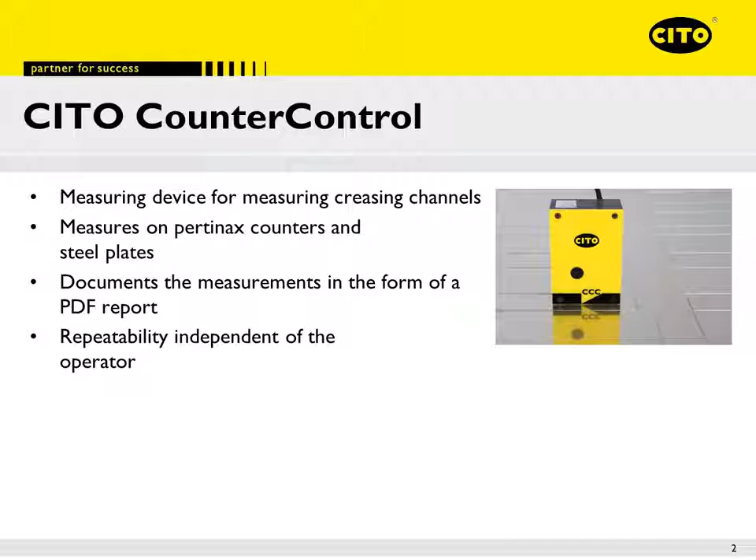CITO CounterControl is a measuring device for measuring creasing channels in creasing matrices. Now for the first time, with CITO CounterControl, the geometry of the creasing channels in the creasing matrices can be measured, and then monitored during production, so that production can be adjusted accordingly. By using CITO CounterControl, the dimensional accuracy of creasing channels can be demonstrated to the customer.

CITO CounterControl is a mobile camera-based measuring device that uses special software for measuring creasing channels. A camera is built into the hardware of the CITO CounterControl measuring device, which takes images of the test item and transmits these to the software. The software subsequently automatically takes over analysis of the image and shows the values on the screen of a Windows-based computer. A Windows tablet can also be used, of course.

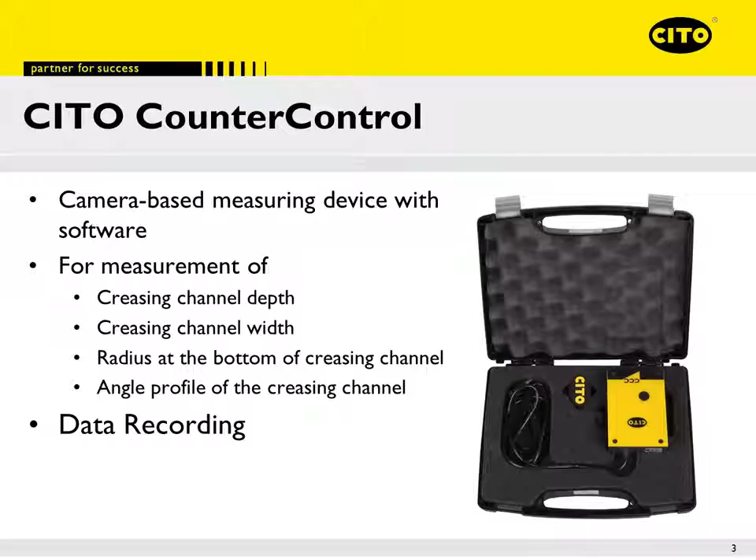Where do the benefits of CITO CounterControl lie? Up until now, automatic measuring systems for checking milled creasing channels have not been available on the market. With CITO CounterControl, quality standards can be defined and tested during production, for the first time. This quality standard can be recorded and added to the client's orders.

The vertical measuring position of the measuring width can be specified in the CITO CounterControl software. This ensures that milling angles at both edges of the opening do not result in measuring errors. Measuring errors are eliminated due to the repeatable measuring precision of CITO CounterControl. This reduces costs in the production process and gives the user a high degree of process reliability. The measuring accuracy is independent of the operator.

CITO CounterControl can also be used in press rooms. It can establish wear on Pertinax matrices, and thus avoid machine downtime in advance.

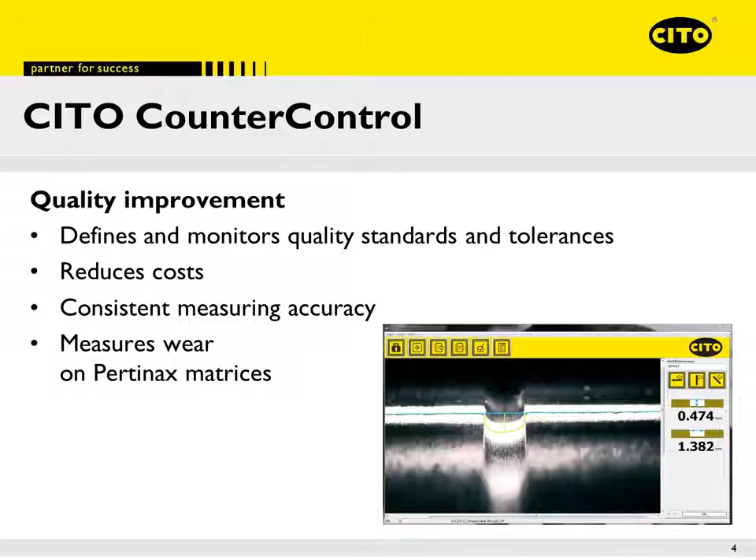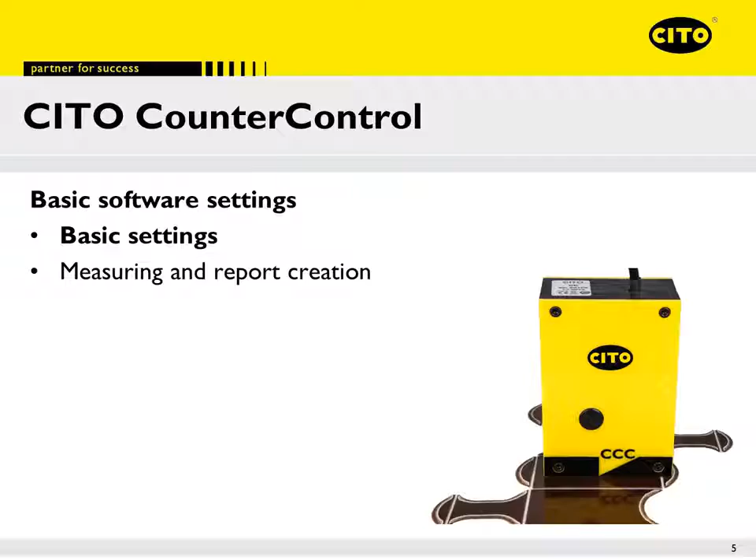So, how does CITO CounterControl work in practice? Basic settings. First, select the basic software settings. Choose the language you want to work in. In the next tab, set the measuring unit and the number of decimal places required. In the input field to the left of the graphic, enter the height at which the width of the creasing channel is to be measured. This value specifies the distance of the measuring point from the upper edge of the test sample.

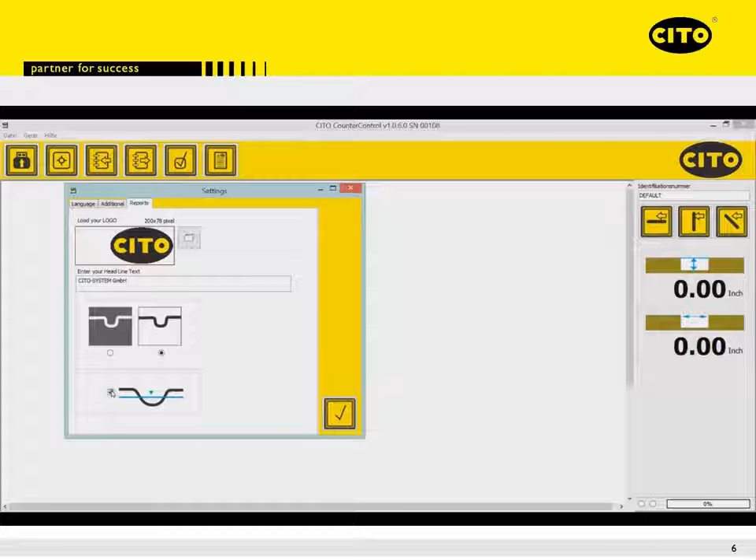In the two check boxes, on the right-hand side, select whether the calculation of the radius and angle is to be executed and displayed in the report. On the third page you can store a company logo and company details. Via the next two windows, you can select the display type for the analysis window in the report. The image, or the inverted image, can be accessed here, with the option of saving ink or toner, for example, when printing out the report. And last but not least, you can also select whether the measuring height should be specified in the report.

Measuring and report creation. To carry out a measurement process, click on Preview. This activates the live camera image. The guidelines given must not necessarily be aligned at the center of the channel. CITO CounterControl has an edge guide along its bottom edge that can be pushed as far as the stop position on the outer edge of the creasing channel. This guarantees that the measuring device is parallel to the creasing channel that is to be measured.

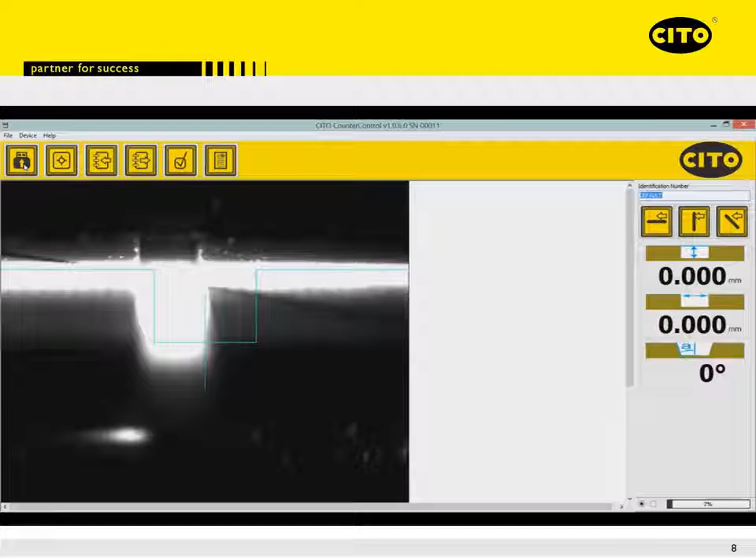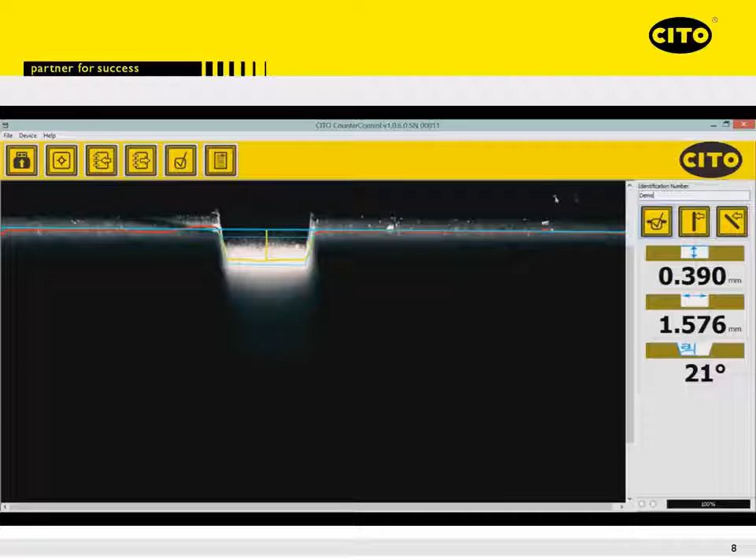Following this, an image can be taken via the shutter release button located on the measuring device, or by activating the image symbol in the software. The width, the depth and, in the case of channels not formed as a right angle, the radius or angle is also automatically calculated and displayed. To transfer these measurement values into a report, select the relevant orientations in accordance with the measuring processes. The options are: across the grain, along the grain, diagonal. The order description can be entered in the window above the orientation symbols. When all the measurements have been taken and the orientations are assigned, the report can be issued.

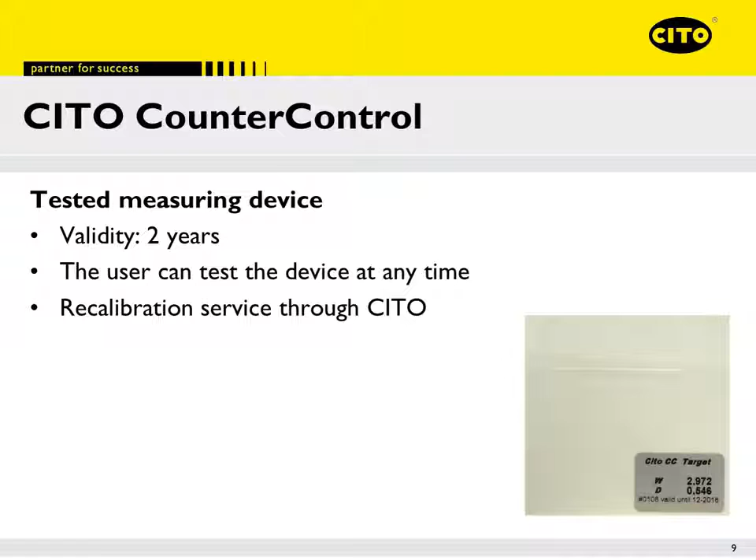CITO CounterControl is a tested measuring device. Validity of initial calibration: 2 years from date of manufacture. A test master is supplied with every measuring device. The measurement values are attached to the test master. The user can test the device at any time by referring to these nominal values. You will see how this works afterwards. The CITO CounterControl measuring device can be recalibrated after 2 years.

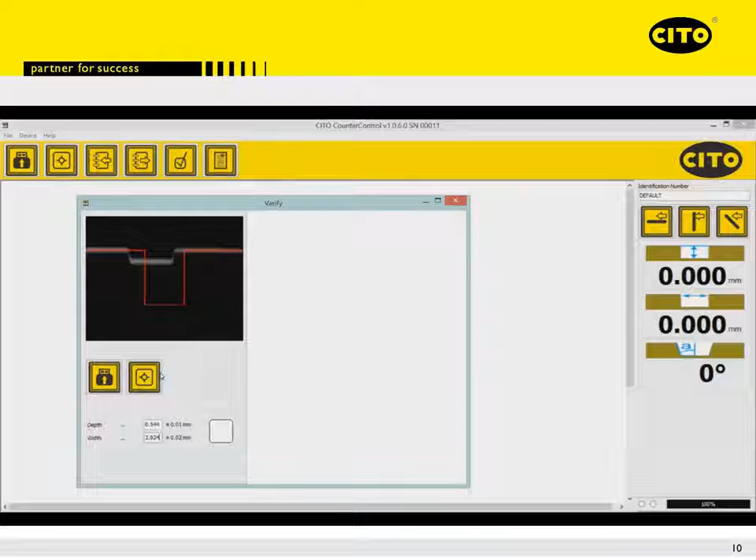The testing procedure is started in the software under Device Testing. The values shown on the test master are tested against the pre-completed values and entered if applicable. The test master is then checked against the CITO CounterControl measuring device. If the values agree, the testing can be documented by means of a certificate.

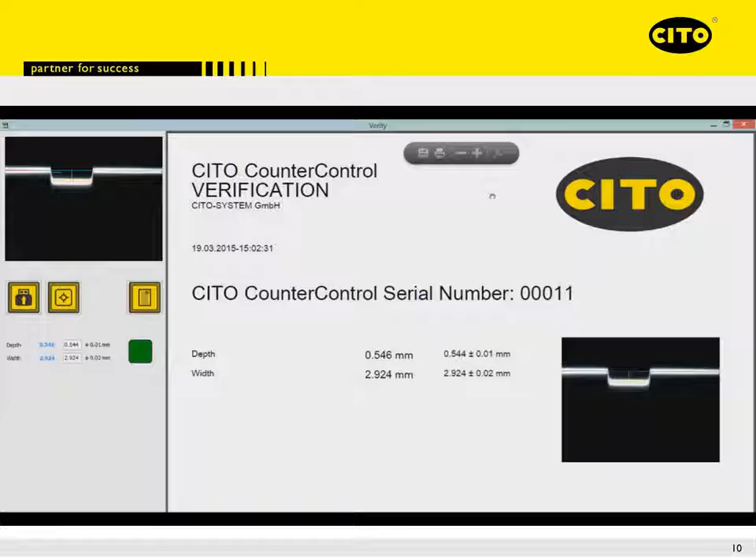CCC. CITO CounterControl. So don't guess, measure.